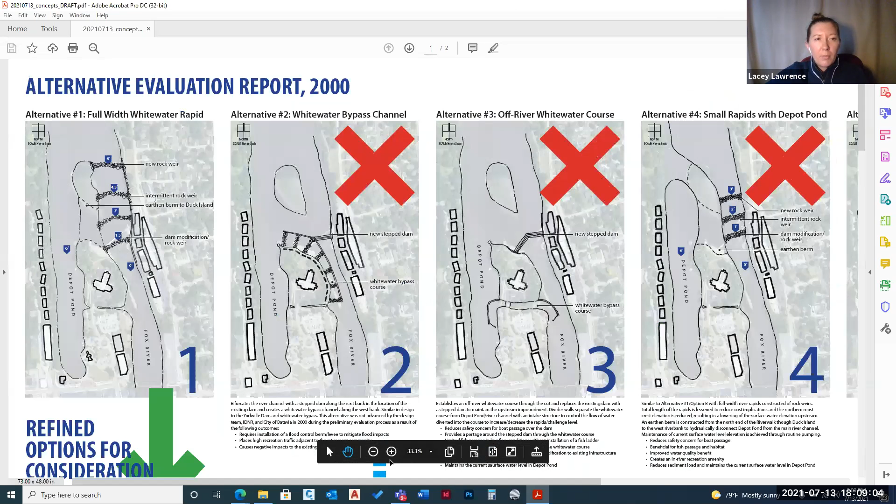This one right here is alternative 1. In this alternative, this is one that you have seen at the last presentation. This was our option B.

In this concept, it created a berm between the north end of the Riverwalk to Duck Island, and created a series of rock weirs, starting at 6 foot and stair stepping down to where the current dam is, which would be modified until we got down to elevation 0, essentially the current water elevation of the Fox River. This created a new impoundment at the north end here, which maintained the current elevation of Depot Pond.

And so this one, after further evaluation for various metrics, we decided that this was a viable option that still would be relevant today. So we continued to advance this option for consideration.

As we move next, this was alternative 2. The main characteristic of this option was a bifurcated main channel of the Fox River. This is similar to what was done at Yorkville.

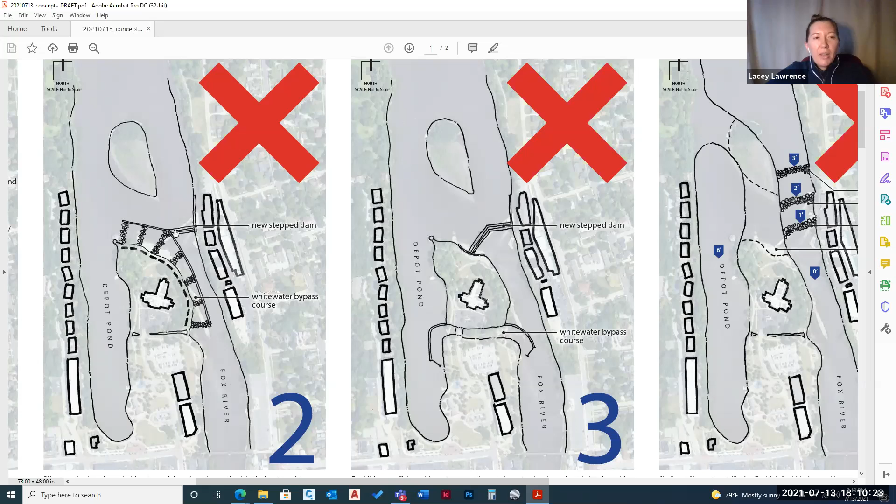So we have on one side a new step dam, in the area of the current dam. We have a concrete separating wall. And then again, a similar stair step down, starting at elevation 6, all the way down to elevation 0.

Some of the outcomes that limited it from being advanced further was the fact that it required installation of a flood control berm that protected the retirement community in the event of a flood, because it raises the flood elevation that would now encompass most of this property in this concept. With that, as well as at the time, it was determined that placing too much recreation in front of the community was not preferred, as well as it had negative ramifications to the current infrastructure of some of the Riverwalk improvements.

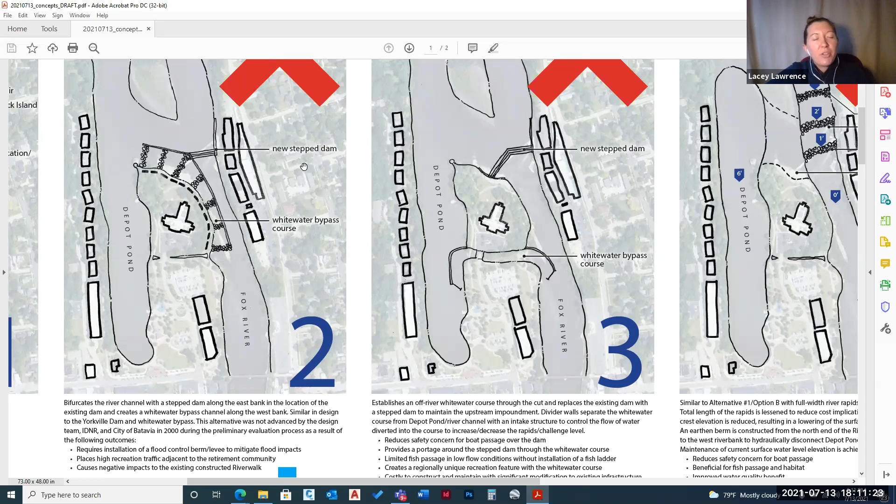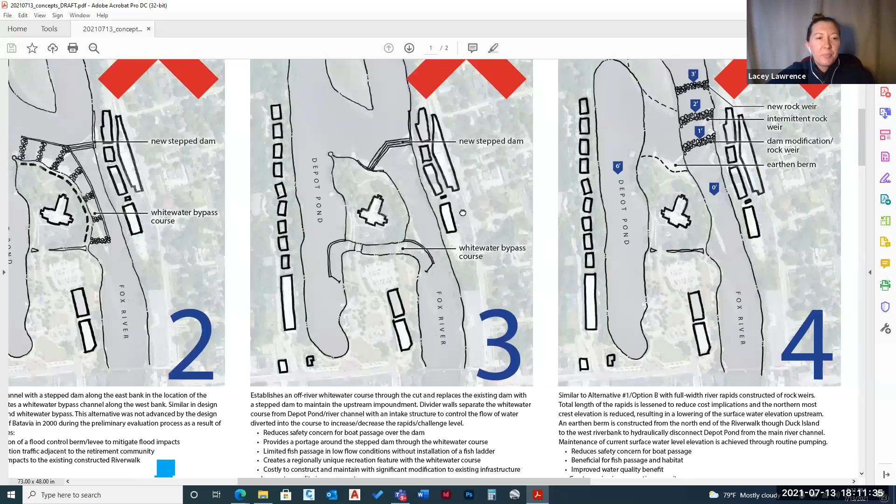So this option was not advanced or presented to you at the last meeting. However, since then, we have made some changes to present a new concept to you, but I'll get to that in a second. So that was alternative 2.

Alternative 3 essentially removes the existing dam and puts in a new step dam, which eliminates the rolling effect that the current dam has. So if you go over it, it's considered a bit safer, and that spinning, churning water at the end is reduced with this kind of dam style.

So in this concept, we get a new dam in place of the current one, which still maintains that impoundment upstream of the dam and maintains the current water elevation of Depot Pond. This alternative creates a safer bypass channel, planned to go through the cut, through here the current parking lot and the retirement community. Depot Pond is over here.

This concept wasn't considered for advancing for several reasons. Obviously, the cost implications for construction and maintenance, and having to reroute roads, parking lots, and current infrastructure made it not an advantageous concept.

It reduced, or increased, safety for boat passage over the dam, but obviously not as ideal as not having a dam altogether. It did provide some fish passage, having them go through the whitewater course or over the step dam, but during low tide or low flow conditions, it might be hard for fish to find the entry of this whitewater bypass to make it through, and they couldn't go over the dam during low flow conditions.

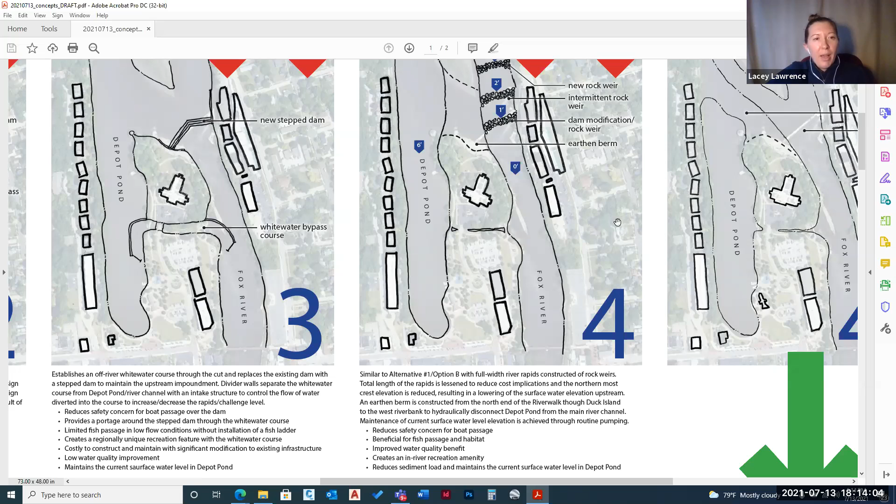Because the dam is still in place, it had very limited water quality improvements, but it did tick the box as far as maintaining the current elevation of Depot Pond. So that, in a nutshell, was option 3, and that option wasn't considered for advancement for those reasons I mentioned.

Then we move into option 4, which is kind of a combination of several of the alternatives. In this concept, it did create an earthen berm from the north end of the Riverwalk. Instead of going directly over to the bank, it encompasses part of Duck Island before it heads over to the bank.

In this concept, it does hydraulically separate Depot Pond from the main channel. It also takes some aspects of alternative 1, where it creates a series of rock weirs or grade control structures to drop in elevation. To save on costs, since the initial one extended all the way to the north end of Duck Island, this option used a reduced footprint for these rock weirs.

But in doing so, it did reduce some of the water surface elevation going upstream, and it did require some modification to the current dam.

So this option wasn't considered for advancement for various reasons. Again, it did reduce safety concerns for boat passage. It does have some benefit for fish passage as well as habitat improvement with some of the rocks and riffles. It does have improved water quality because the water impoundment is reduced a bit upstream, and it creates a bit of a recreation amenity, not as much as the whitewater course does, but still of interest.

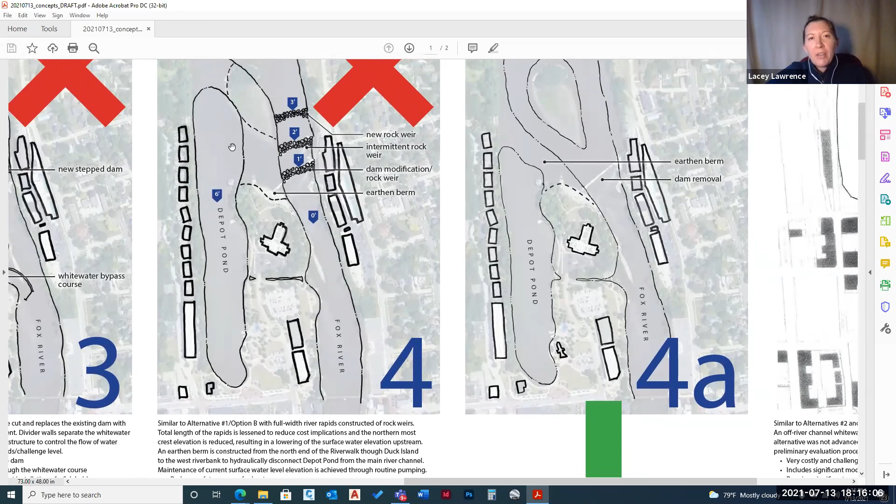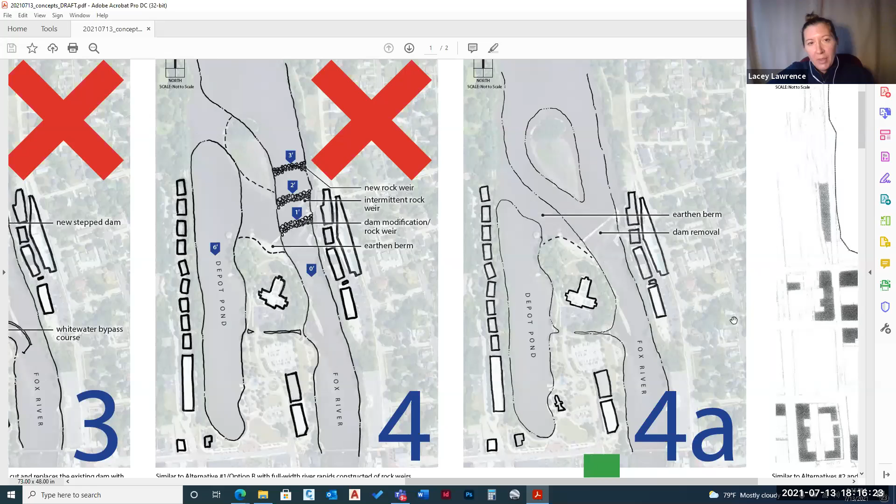Because the Depot Pond is isolated from the main channel, it does maintain the elevation and reduce the sediment load to Depot Pond, but a negative outcome is this would require routine pumping to maintain the current water elevations. So that was option 4, and it's very costly because it includes the berm and the rock weirs - it's several concepts in one, so it's an ideally very costly option. For those reasons, we didn't advance option 4.

Then we move into 4A. This is one you did see at the last presentation - it was actually renamed option A from last time, if you remember. In this option, we remove the dam entirely, so the impoundment upstream, the water surface elevation, does drop 6 feet. Then, to maintain the current elevation in Depot Pond, it requires construction of an earthen berm from the north end of the Riverwalk to the bank. Again, similar to option 4, this does require some routine pumping to maintain the elevations of Depot Pond, which I'll go into when we get to our final concepts for consideration. But that's that one in summary.

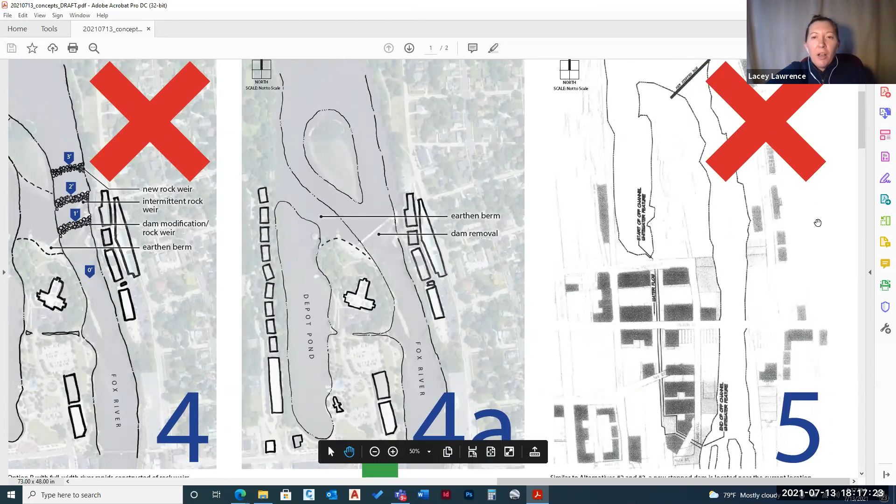The last alternative presented in the report is alternative 5. This option puts in a new step dam where the current dam is now, and it essentially creates a whitewater course through the core of downtown. Down at the south end of Depot Pond, it goes through buildings and streets until it outlets down by Mains.

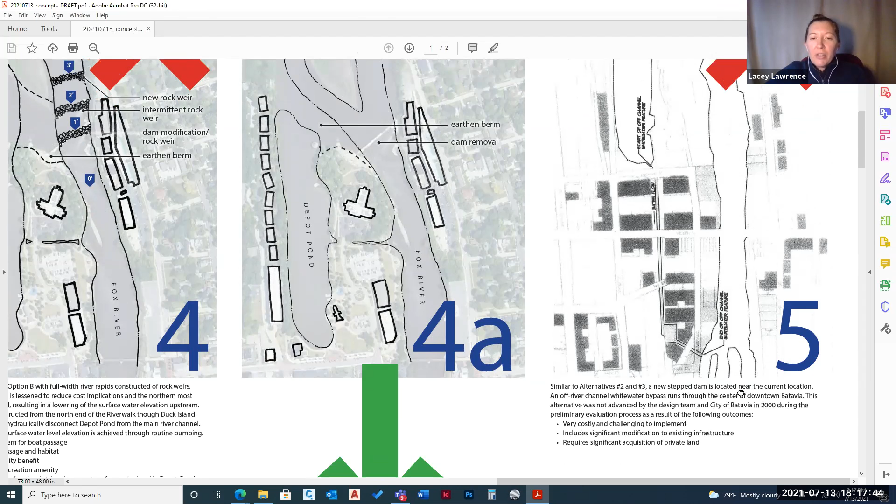So obviously this option was not considered for advancement. For one, it was very costly, challenging to implement as far as permitting, as well as impacts to current infrastructure, roads, buildings, and requires significant acquisition of land. So this option was not considered for advancement.

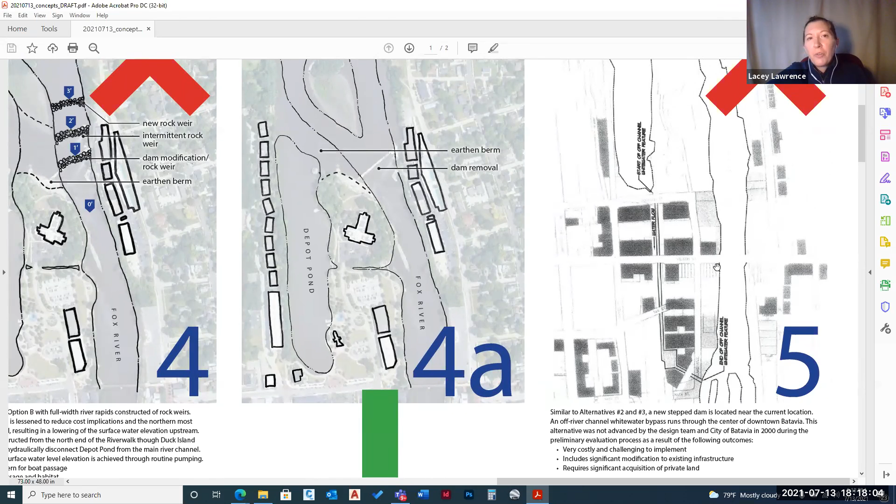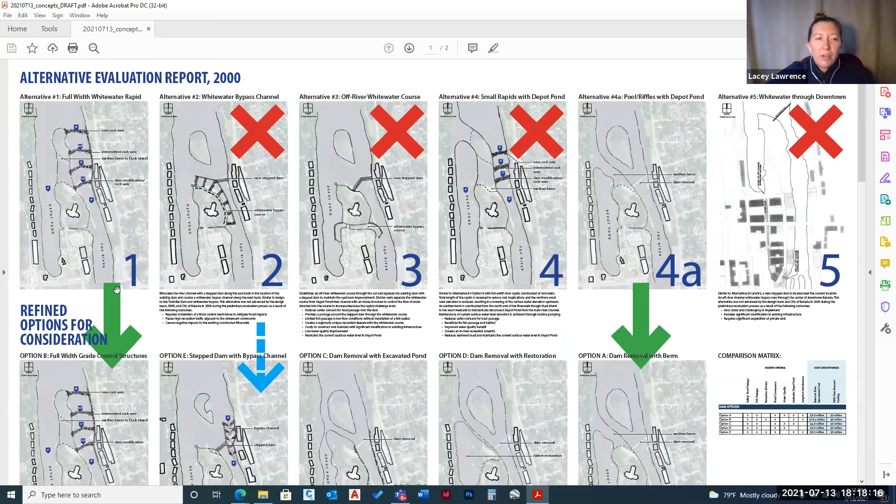So just zoom out here again. Kind of a summary. Here's alternative 1, 2, 3, 4, 4A, and 5. So again, we considered advancing 1 and 4A from those options. And so this brings us to where we are now.

So our options for consideration currently are option A, B, C, D, and E.

So at our last meeting, we presented on A through D. And so E would kind of be the new concept that you haven't seen yet. It's essentially a version of alternative 2. Let me zoom in here again.

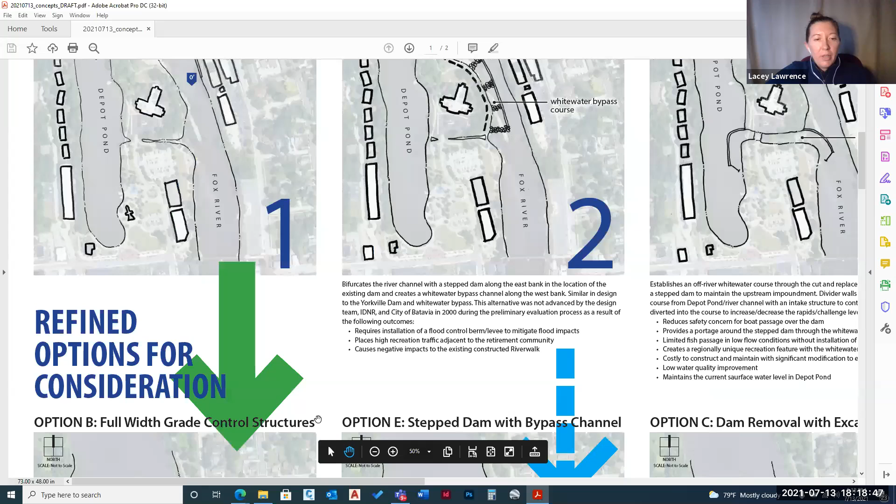So again, as we presented, this is option B, very similar, essentially exactly the same as alternative 1 that was in the report. And then option E is the new one. So this is a variation of alternative 2.

Essentially what it takes is the concept of the new step dam and the bypass channel, but it switches them. So now instead of having the step dam along the east bank, the step dam is on the west bank, and our bypass channel is now on the east bank. We also reduced the footprint to a minimal length in order to achieve the drop that we need with a certain elevation to maintain a more recreation-based bypass rather than a more challenging, moderate to high flow in the channel.

And so what this does is since the dam is on this side, it maintains the current water drop in the flood elevations that are there now. So therefore it kind of alleviates the need for the flood wall along this bank here. And because we currently have walls on the east bank, the elevation change with the water and flooding in this area would be less of a concern, but we'll have to model it, obviously, if we advance this concept further, to ensure what those flood elevations will be and how it impacts current infrastructure.

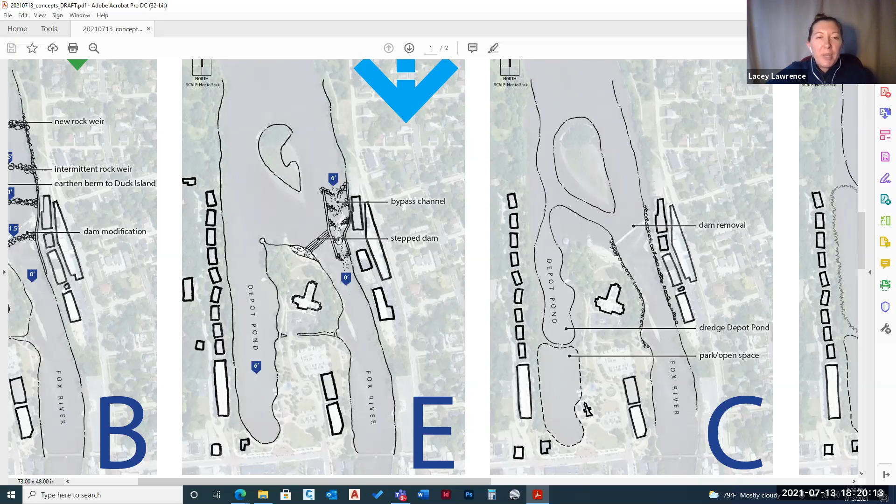So going forward, this is considered a little bit less costly than option B was because of the limited footprint, the length of the channel improvements are less, so therefore the cost is a little bit less. It still creates a recreation amenity through the bypass. It's beneficial for fish and for boat passage since we have the bypass channel being in the main channel.

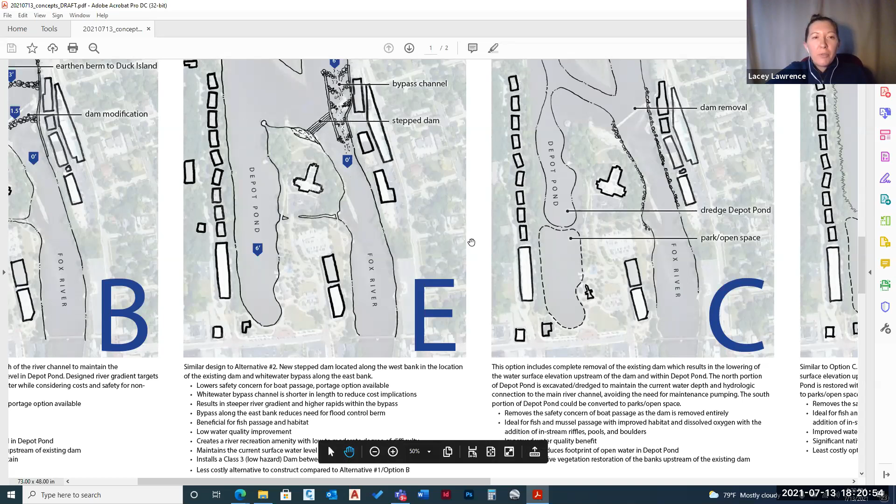Again, a lower water quality benefit because we still are maintaining the impoundment upstream of the dam. It maintains the current surface water elevation of Depot Pond without requiring the need of routine pumping. And then we can also possibly provide additional options for portage.

And then move on to option C. This is one we presented last time, so I won't go into too much depth on C and D. But essentially, C was the concept where we remove the dam entirely. So it reduced the water surface elevation upstream of the dam. And in order to maintain some amount of open water within Depot Pond that didn't require pumping, so it'd be hydraulically connected to the main channel, was by excavating the north end of Depot Pond.

So it drops the surface water elevation down 6 feet. By excavating it, it maintains the current depth that the pond is now. It'll just be, the water surface elevation will just be lower by 6 feet. And then at the south end, converting some of this to park open space, to be determined on what that would look like in the future.

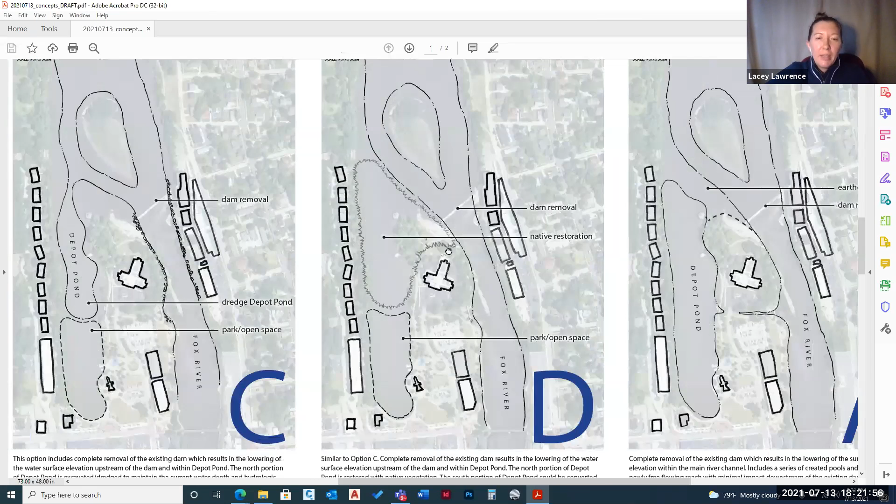And then option D was essentially very similar, where we removed the dam entirely, but in option D, we restored this north area with native restoration, seeding, plants, and then converted the south end to parks and open space. And then option A, which is a variation of alternative 4A, again, created the land berm separating Depot Pond from the main channel.

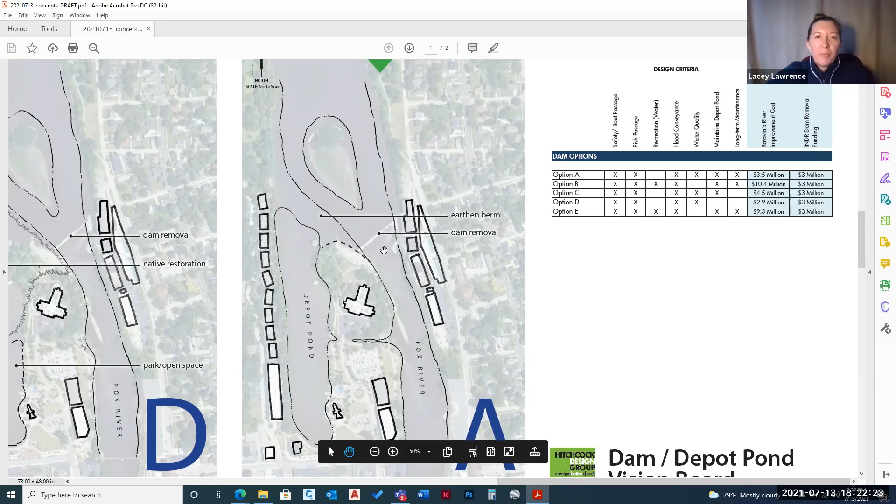So with that, we did evaluate each option for costs, which always plays a significant role in decision making. We have the matrix here off to the side. Zoom into that real quick, where we evaluated each of the options for consideration based on some of these design criteria as well as cost effectiveness.

So most, all the options, again, IDNR will support each of these concepts, because it does provide a safer passage for boats in all the concepts. All the concepts do provide some amount of fish passage. Some have additional recreation amenities, whether we do the whitewater bypass or the whitewater course. All of them still allow for flood conveyance. In the concepts where we remove the dam entirely, obviously we have improved water quality because the upstream impoundment is no longer there. We have more of a free-flowing river condition. And then most of the concepts maintain some amount of Depot Pond.

Some of these options have obviously varying amounts of long-term maintenance involved. So we kind of check the boxes for the ones that might require more maintenance, whether it be for pumping

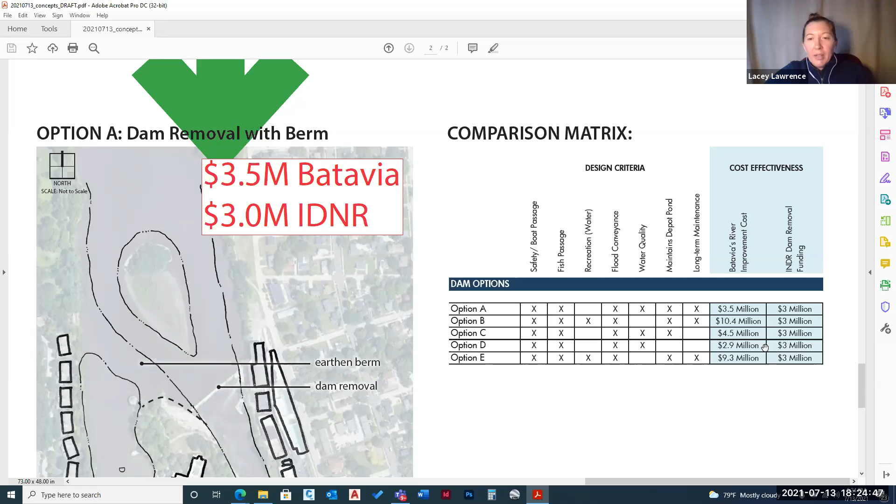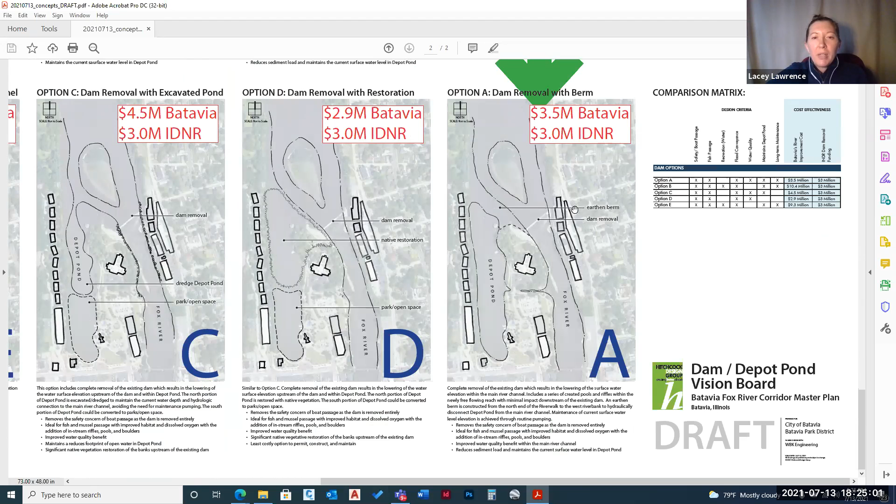The second least expensive would be option A, where we create a land berm here to separate the dam and Depot Pond. Obviously, this cost does not include what the long-term maintenance would be for the annual pumping for the year.

Then the next least expensive would be option C, where we excavate out Depot Pond to maintain the northern portion of Depot Pond. Option B and E are very similar in cost. As we discussed when we ran through the options, option E is a little more cost effective just due to the limited run of the whitewater course rather than extending it the full width of the channel and over 900 feet in length.

So with that, let me open it up to any questions we have on the current presentation, and then we'll move into discussions.

And Lacey, if I could point one last thing out: for the concepts that require any fill within the river, such as concept A, where we're creating a land bridge between the peninsula and the land to the west, anything where we're putting fill in the river will require some form of mitigation of that fill somewhere else along the river. So those solutions would be further evaluated if any of those options were considered.

Steve, I have a question in regards to that. Do we get any credit for when the dam is removed for that compensatory storage? Or would the earthen berm be completely 100% something we would have to provide, because we are removing product from the river?

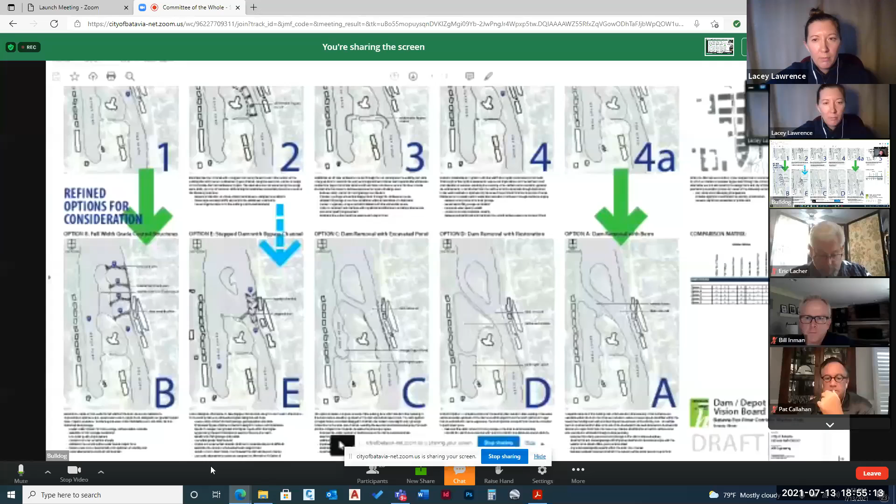Okay, there. John, could you repeat your answer?

Sure. Yes, we had a meeting with IDNR last week. They discussed the Yorkville Dam. They were going to provide some numbers to us for the cost of that dam modification. We have not received those numbers yet, so once we do, we will have a better idea of comparison and costs for alternative E.

Your Honor, let me throw a few history notes into this whole conversation. 60 years ago, in 1961, Art Swanson, who later owned the hardware store down here, was elected mayor of Batavia. Mr. Swanson had the vision that he needed to take more of the centralized area of downtown and add some more commercial activity to it.

One of the things that needed to be done was they needed to fill in what they called the second channel of the Fox River. So I was told a story by Mr. Swanson and by Francis Yelsey, who was then the city attorney of Batavia, that in 1961 they got in a car and drove down to Springfield to the Illinois Division of Waterways, I guess that's what it was called at the time, to have a discussion about what they needed to do to go about filling in the second channel of the Fox River.

Now, the second channel of the Fox River in those days is depicted on the back wall there in that Saturday Evening Post cover that everybody's quite familiar with. It was done in 1958. What most people don't realize, when they look at it today or put one up in their house, is that when John Falter painted that picture, that was not the pond that we have today.

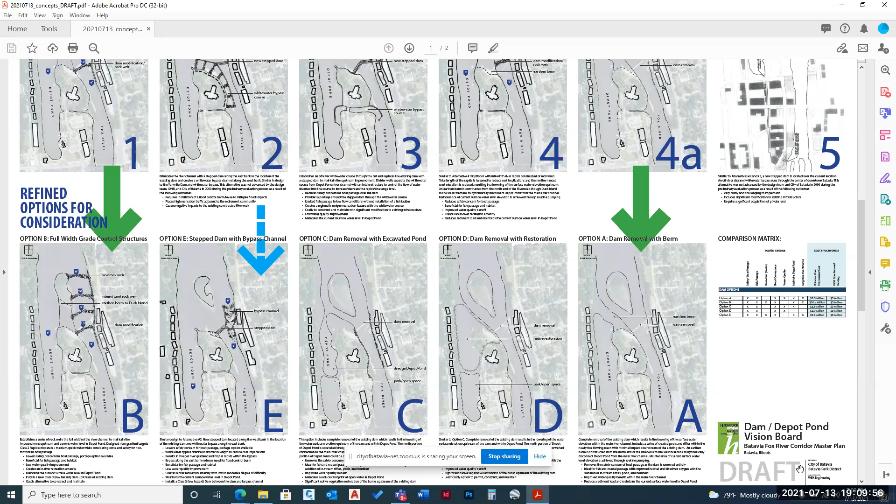Yes, the dam creates a situation where there's less velocity, less flow upstream of the dam. When you remove the dam, it creates more turbulent flow, more velocity. When there's stagnant water behind the dam, there's less oxygen in the water, and therefore less conducive habitat for fish. So as you remove a dam, you increase the velocity at the dam, you remove the stagnant water and create flowing water where there was stagnant water behind the dam. It now becomes flowing water and creates better habitat for fish and for all the critters that live in the river there.

So it's the reason a dam creates kind of anoxic stagnant water, whereas dam removal creates more free-flowing river and better conditions for fish. Hopefully that explains it.

We lost you, John. John, you're muted. Lacey, can you mute your... I don't know what that is.

Just to reiterate, when there's a dam, it creates stagnant water upstream where sediments settle out, creating anoxic conditions in the summer where there's less oxygen for the fish. When you remove a dam, there's more free flowing water. It removes that stagnant non-free flowing water behind the dam and creates better habitat for fish because there's more oxygen, more flowing water. So that's the primary reason dam removal increases habitat and is better for water quality, because it takes away that anoxic condition. That's one of the main problems with dams: the low oxygen condition behind the dam, and also it collects sediment, which could be harboring heavy metals and contaminated sediment. That's the other environmental factor mostly related to dams.

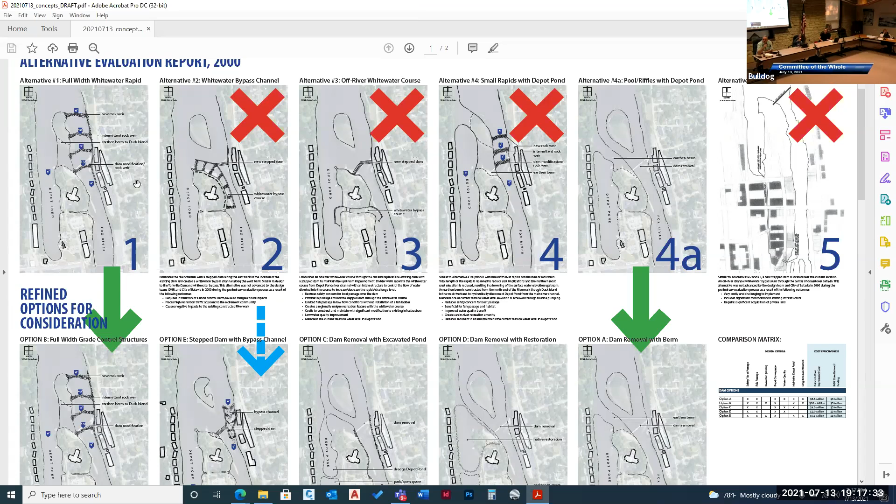So I think at this point, if we could get better numbers on what they think the initial costs or a range for operational costs would be on pumping for whatever of the options - A, C, and D that we had there - then we could decide. I think one more meeting, we decide which one of these 5, or all of these 5, or 2 out of the 5, whatever we decide to go with, that's what we would go to the public forum with.

I think that's where we need to be, because if we put 5 out there, we're never going to get a decision if we go publicly with that. I would concur. I agree with you.

One last question. Is there any way to - they bring up this great idea of what we're putting back into the river - is there a way to understand, with taking out the dam, with these different concepts, how much is being put back in, whether it be estimated for a park or for the rock tiers, how much are we putting back in? I'd be interested in cubic yards, because that's how they're going to quantify it. Just an idea so we can understand and compare, because if we're saying we're taking out 3 cubic yards, yet with some of these concepts we're putting in 6, is that what we really want?

That actually was the same point I was making, though - that's the great unknown, right?

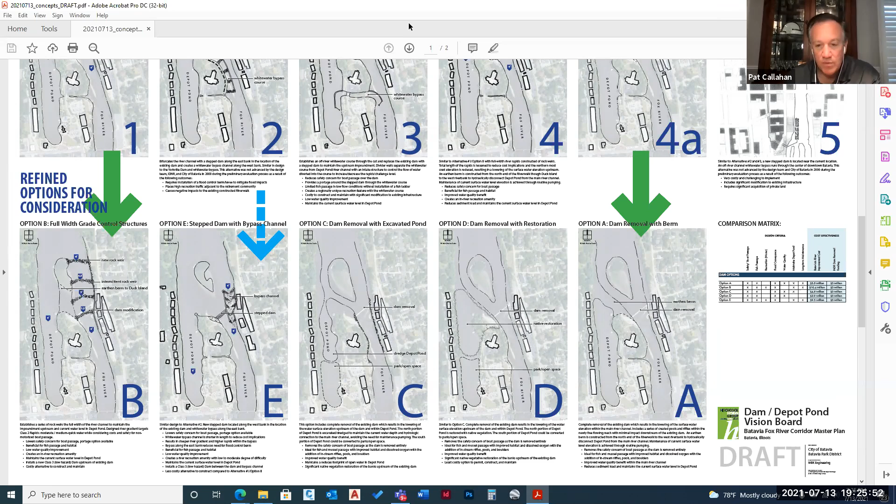My other concern is that the 29th is historically the number one vacation week of the entire year. I want to make sure our public meeting is well attended, since this is such a big decision for the community.

Yeah, so it had been tentative. We'll take that off as to be determined. Once we've made our determination of what the options are going to be and the data we feel confident with, then we'll set the public meeting date. That sounds good. I think that's easier than constantly pushing it back. We've got a lot of people very interested in this, so we want to make sure we get as many of them at that meeting.

When that happens, staff will put our heads together with Hitchcock Design Group to determine the length of time they need to put these numbers together. Eric and I will work with you and the park board to determine what date we can bring this back for discussion with those numbers, and have that drive when we reschedule the public open houses.

One more quick comment. Mark, go ahead, you mentioned flooding. It would be interesting to know—not that I support C, D, and A or C&D, certainly I do not, least of the other three—but from a flooding standpoint, the common levels the river gets to, how tall does that berm have to be to keep the river from destroying whatever's created in that new park space if you do something like C&D? Again, I don't support it, but that's another factor.

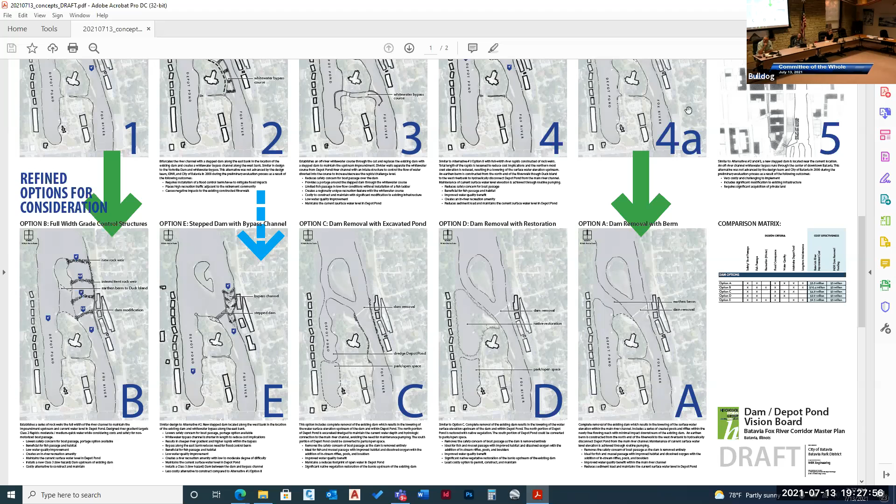Okay Pat, thank you for hanging with us a little longer than a normal meeting here. No, we appreciate the dialogue.